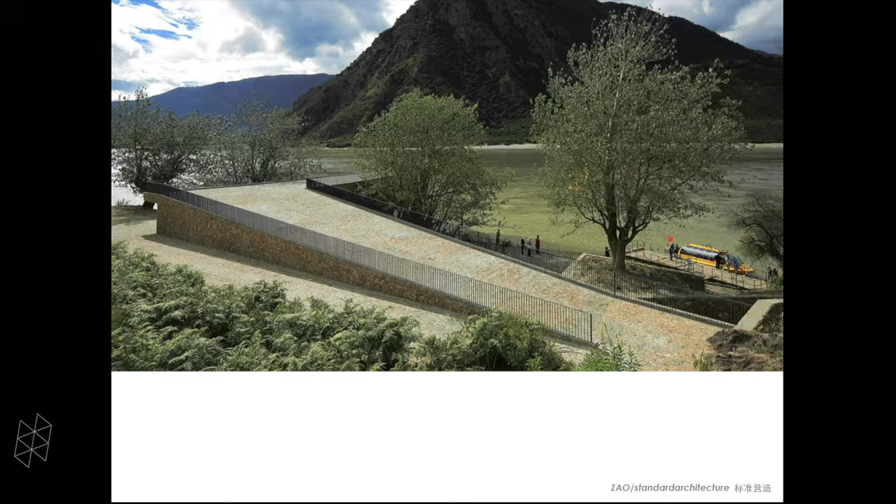So this is how this first small boat terminal was. You can see here there are just 3 parts. One part is the waiting room for the boat to arrive or just arrived, the second part is the toilet, and the third part is the section that cantilevers into the river, the Yarlung Tsangpo River.

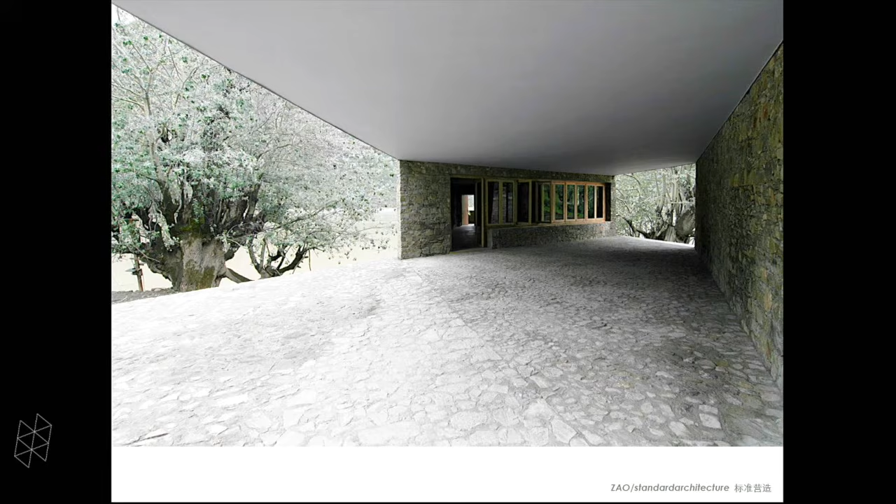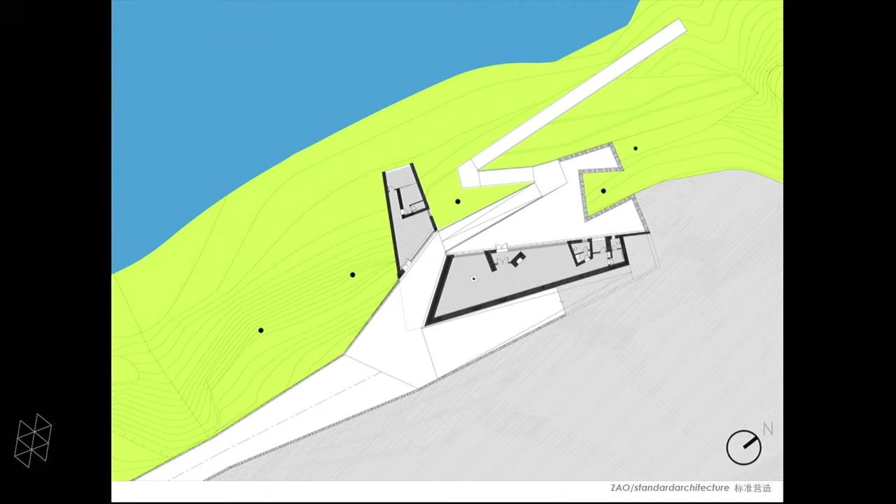Of course, sometimes the weather gets so bad that you have to stay overnight, so this room is for passengers to stay overnight. On the plan it's very simple—it's this ramp going over. We found these 4 very big trees, and you can see the plan was studied for quite some time until it reached this simple state.

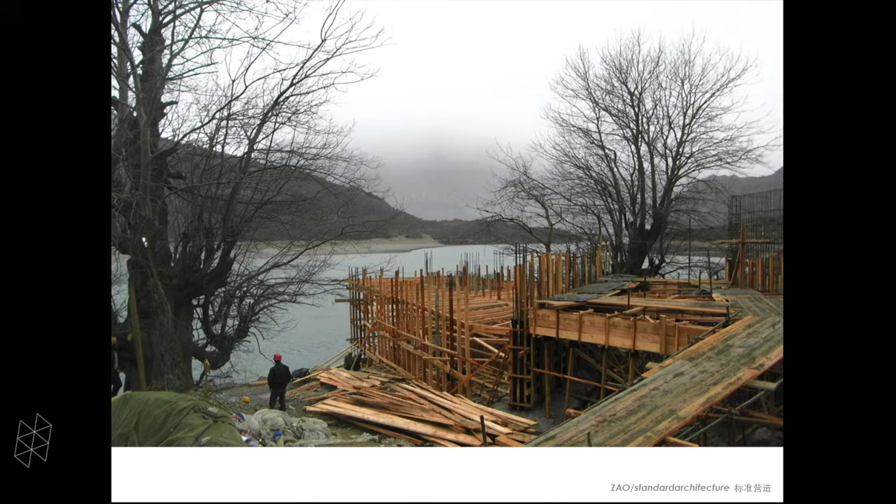This is the stone material collected on the site, along with these very big trees, which we had to protect in the process. The construction itself is very basic, I would say.

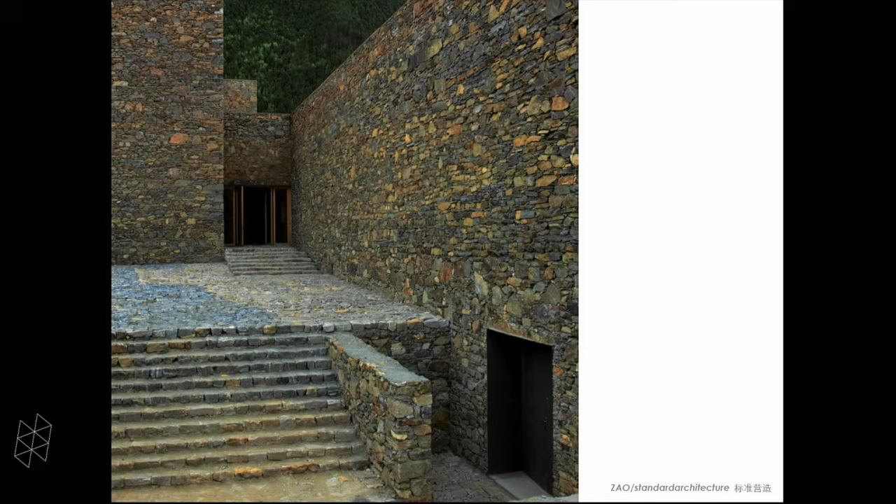The second building is this visitor welcoming center at the entrance of the Grand Canyon. This was also designed at the same time, almost the same period, but of course this one is bigger. At the entrance of the canyon there is this mountain, so we wanted to do something that's almost a landscape installation.

So it has this slice of a rectangular volume that cuts into the hill and grows out. The fact that I took a landscape studio here at GSD was very helpful, because in Tibet, architecture is landscape, and landscape is also architecture. That's also to see it not only as buildings, we have to always engage the topography, materiality, and also plantation there.

I wouldn't go too much into description of this. I know Frampton showed it last time, but it was also a lot of spirituality deliberately designed. I call this a stairway to heaven. We have these narrow walls and then the skylight coming down.

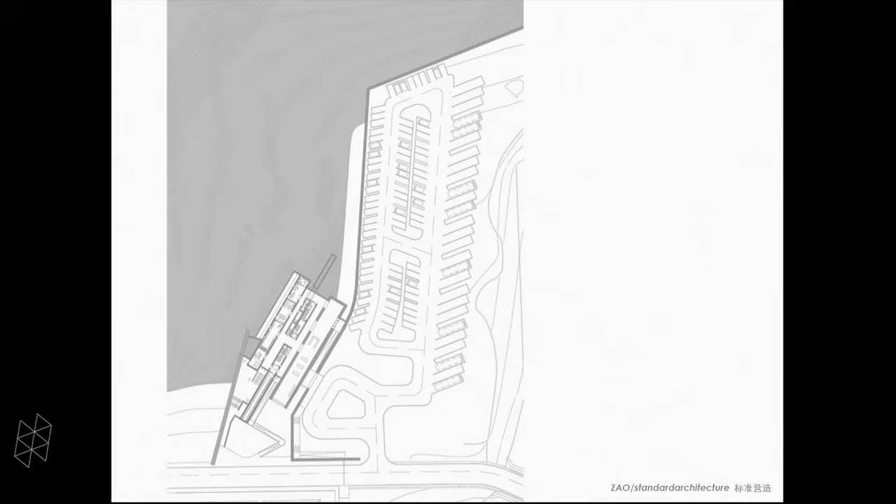We're lucky that we were able to get one meter thick stone masonry walls to build, with only concrete reinforcement. And this is the section, you see the existing slope.

One of the interesting parts of this building is we were able to draw resource of the masonry workers from Shigatse, which is close to the Ali area, to this area, because they are famous for building very nice masonry walls. So we couldn't have designed these patterns as it is, but the good thing is to give them the freedom of interpretation, and involve them in the building process.

One of the biggest debates here was how to have something clearly contemporary without shouting out, which I think is very easy nowadays - to be loud and contemporary - but here we wanted to do something more quiet.

In Tibet, because of the masonry walls, they have to build thicker on the bottom and thinner on the top, because it's just masonry. So here, one of the deliberate expressions is we made the wall deliberately straight, to show that it's not one of these other vernacular buildings without too much thought.

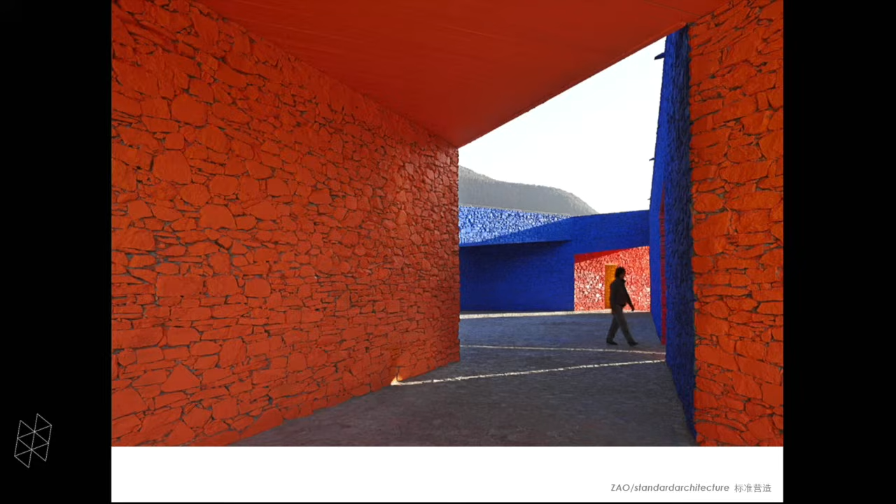Around 2008, I started something in my studio, a semi-independent studio, because I was aware that now in China you have a lot of great talent that comes to work, but it's impossible to get them anywhere in the world - you have them stay in your office forever. So I decided, why don't we speed it up? After working in my studio for four years, I set up this semi-independent studio, which is Zhao Yang's studio, who later was recommended by me to come to GSD.

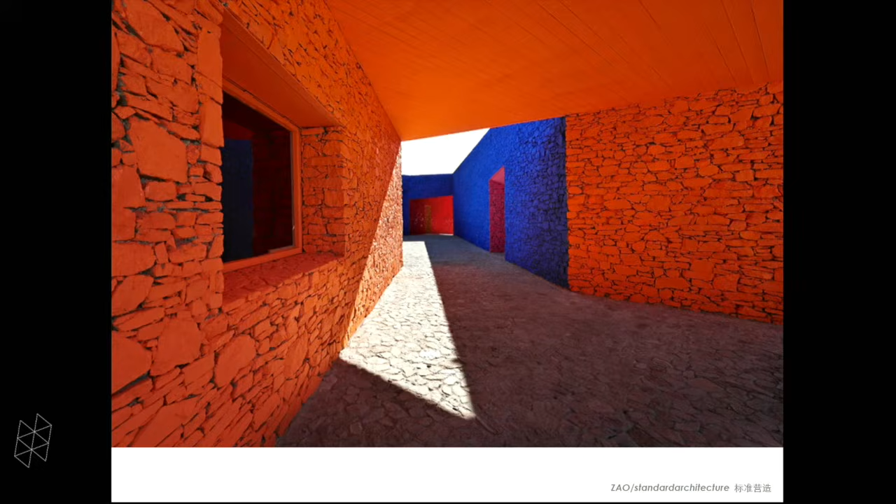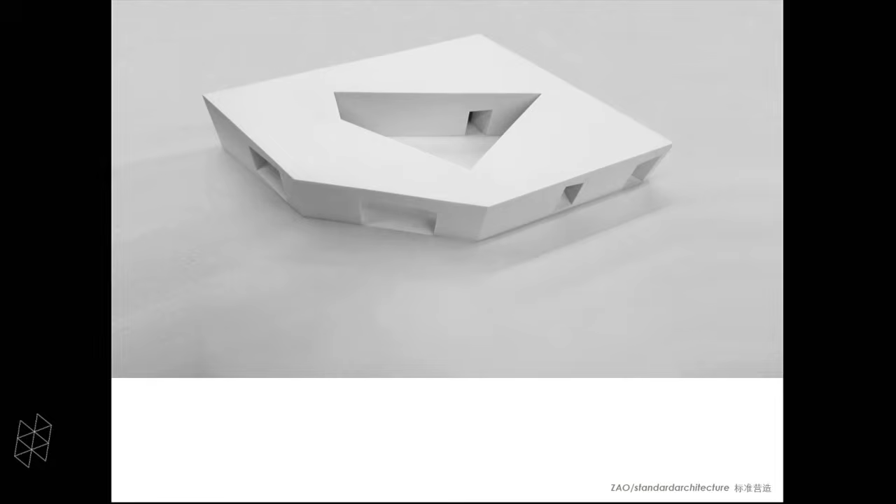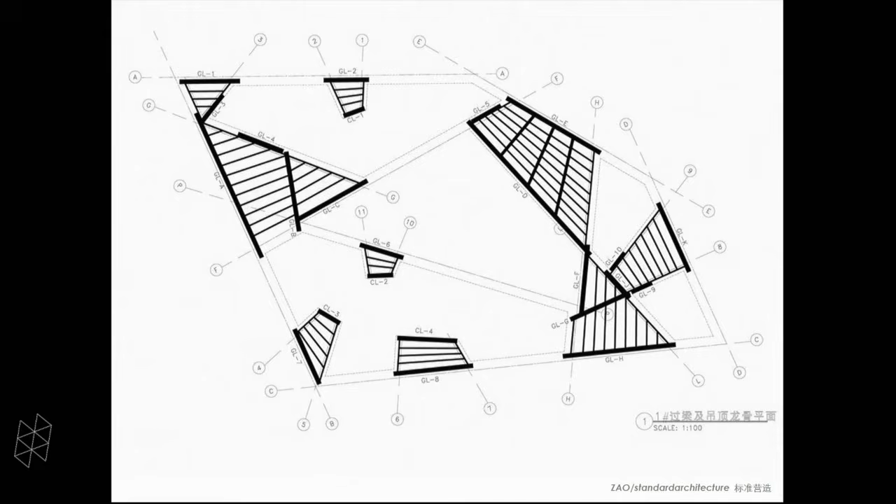Now he also was part of the Rolex program a few years ago. The idea here was to do something completely with wood structure, while the former two buildings used concrete reinforcement. This one took the structural types exactly like the old houses in Tibet, using these wood beams.

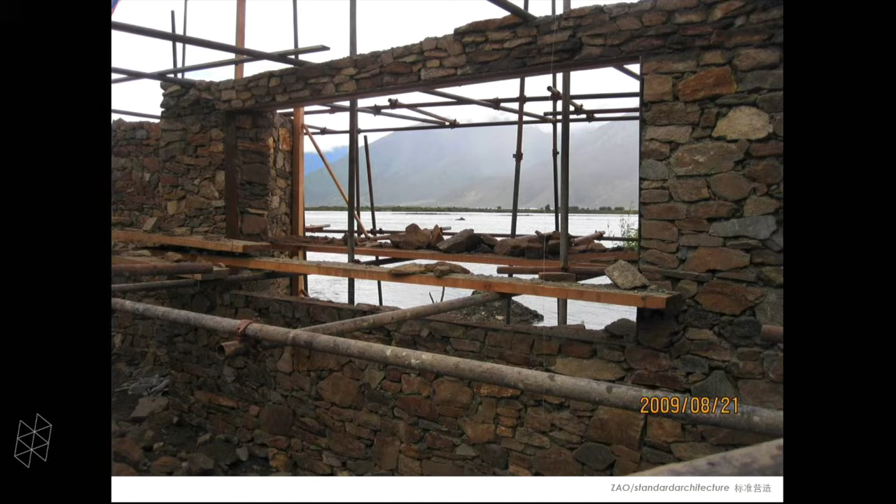We wanted to see if we could make a completely contemporary building that nobody would doubt from even the first sight. The whole process of building is very humble, but in the end, the idea is that at certain point, stone can also fly.

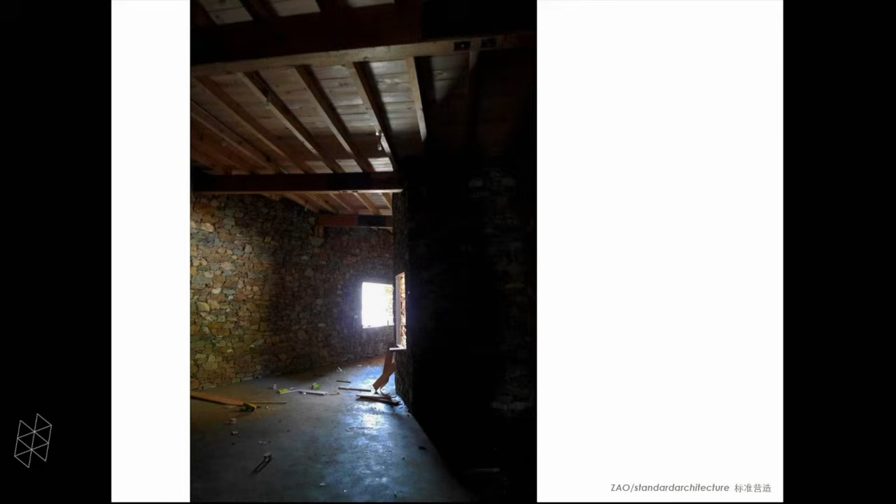Of course, this building, in the end, until now, still remains one of the illegal buildings, because we cannot get approval - it's a totally traditional structural typology that cannot get approved. If you don't use steel or concrete, you cannot get approval. So yeah, it's one of what we call the unauthorized buildings.

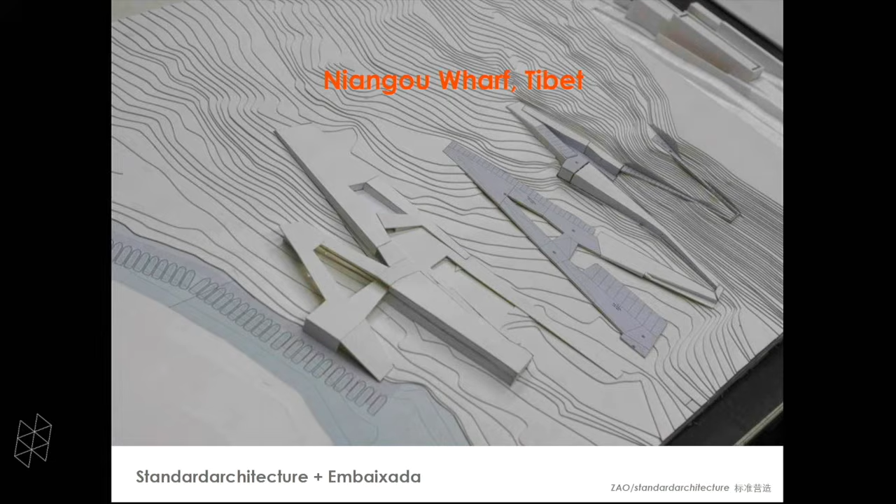The other building I'm going to show - at the same time we also invited a young Portuguese office called Embaixada, because one of my partners, Claudia, is a landscape architect from GSD, one of my classmates, and she's from Portugal. So we invited them to brainstorm for the first month, and we came up with this nice idea of one of the biggest boat terminals, similar to the other small one - a ramp going up and zigzagging, sometimes as a waiting room, restaurant, and parking lots, winding up to the boat driver's dormitory and their recreational space, a little auditorium and office.

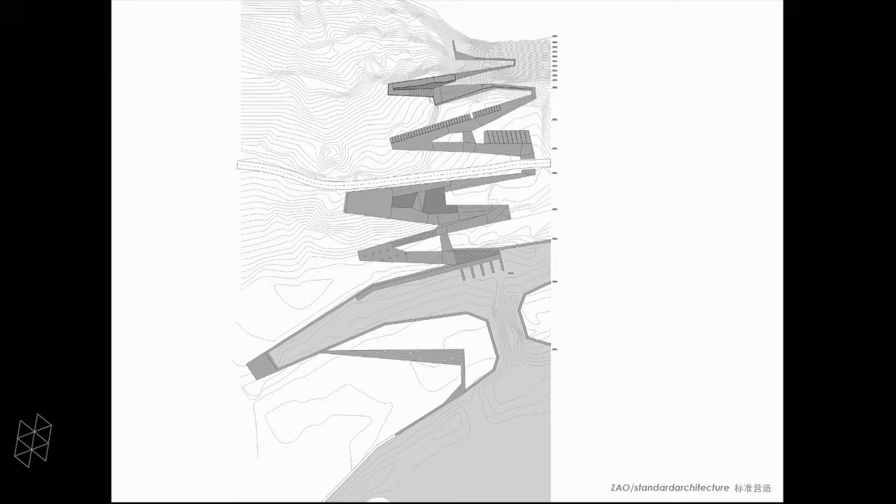I think this is totally a landscape, which in Tibet is, of course, very strong of the site, but it's also part of their own building tradition, which is what they call Tianti, like stair to heaven. One of the interesting things is actually all of the stone used in this building we carved out of the site, so we don't have to ship a lot of materials from elsewhere.

And again, clearly on the windows and details, we refuse to adopt any kind of typical Tibetan motif, because we had some debate.

One thing I think is interesting about doing projects in this kind of culturally very strong background is what I call looking eye to eye, on the same level. Because usually if you go to Tibet, there are two types of people: either you look up so much that you admire them before you even go there and say 'I copy,' or you have this condescending attitude, saying 'I know so much, I'm from the advanced world, I give you something.' So, but then, you know, we have to...

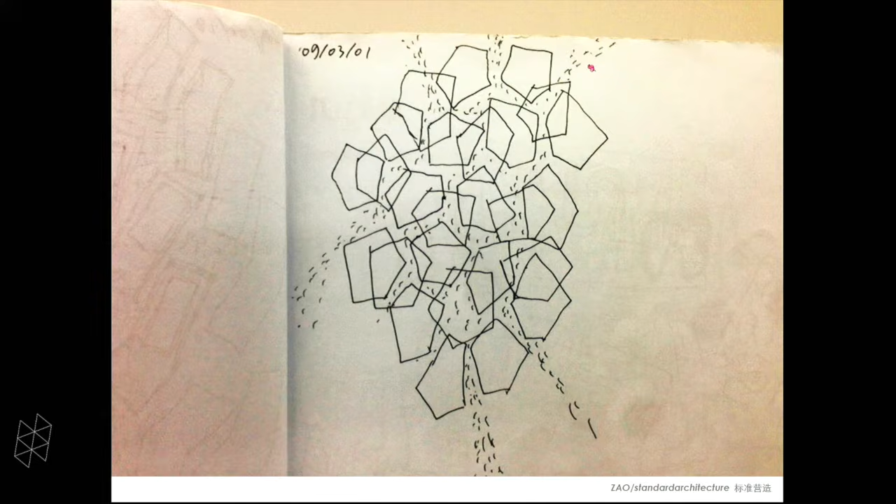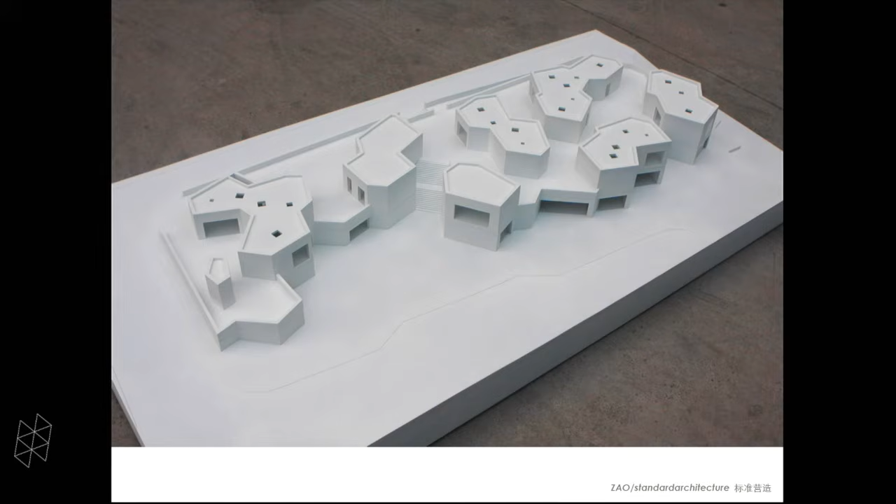This is a bus station and art center. The art center, of course, was proposed by us because they wanted a big bus stop, as well as a big tourist canteen. And then because it has two levels, on one level higher, this level is the bus stop, so we have a big public toilet and canteen underneath.

And here we made this kind of village-like street, which also resembles some of these big rocks up the hill. And because this is one of the biggest buildings in the village, we don't want to make it look so intrusive. Actually, when it's built, it works quite well.

Reflections, you can see the village. And that's the kind of decorations that they have.

The last building I want to show in Tibet is this. Actually, it's not a building; it's this landscape. It was not a project in the plan before, but we were planning this route also when we drove by, and then in the back is this Namcha Barwa, beautiful mountain. This is the Grand Canyon, and then this is this very old mulberry tree, whose canopy is about 40 meters wide.

So I talked to my friend Oh Yang, saying, why don't we make a place here that people can come to contemplate. The original way I persuaded him was to say, maybe you can build a place that people can get married here. They said, oh great, you know, that's the idea. So that's how they got budget, but which is not too much.

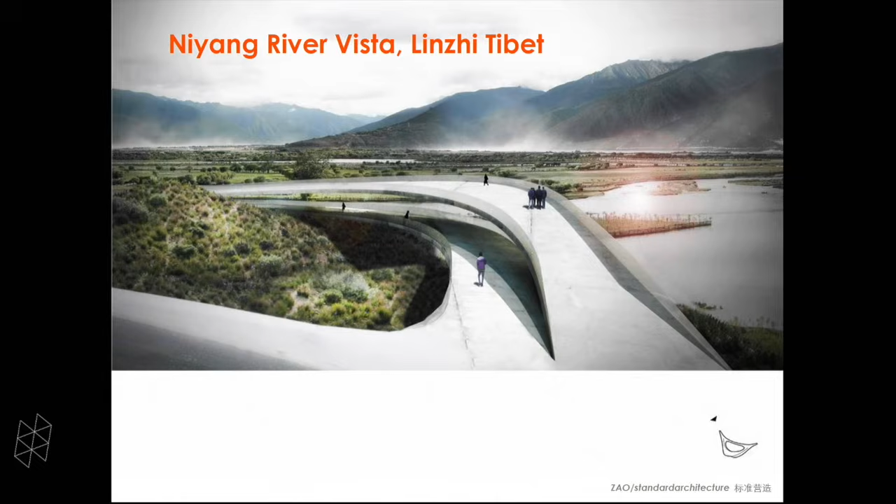And the other one is at the merge point of two rivers, where they were planning to do a Vista Point. I intended to design something that's a Vista Point that moves, so people can see the movement of the two rivers, with a Tibetan teahouse underneath. So they all liked it. We worked out all the construction documents two years ago, but now the company already made some money.

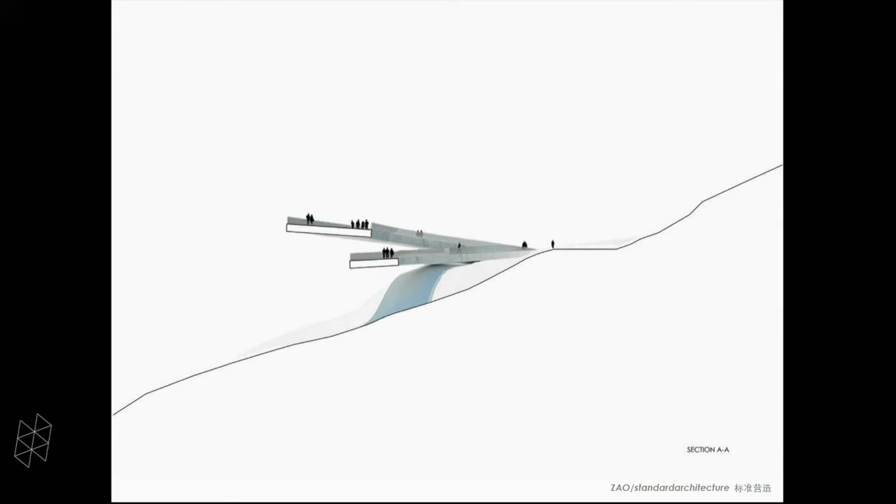They have a lot of bureaucracies to control us, and this building they calculated is four times their budget, so they still haven't built it. But the idea is maybe at certain point we don't have to be totally limited to the idea of being extremely humble.

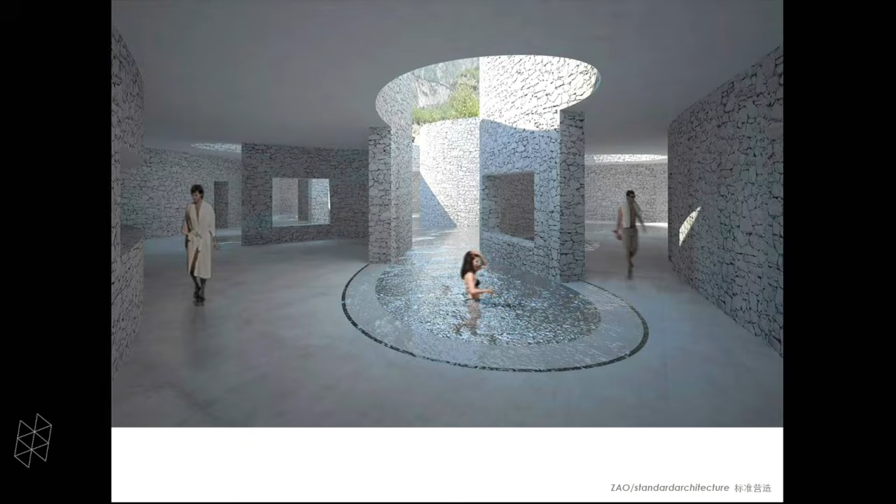At certain point we can go with stronger improvisations. This small spa also got cancelled because of landsliding after our design, but of course this hot spring is natural, and the idea of this is very interesting. It's the concept of a spa. We asked the basic question: what's the best spa ever we can have? Among our 20 schemes, this was the best answer: the best spa ever was us inside our mom's belly. So it's this kind of protection.

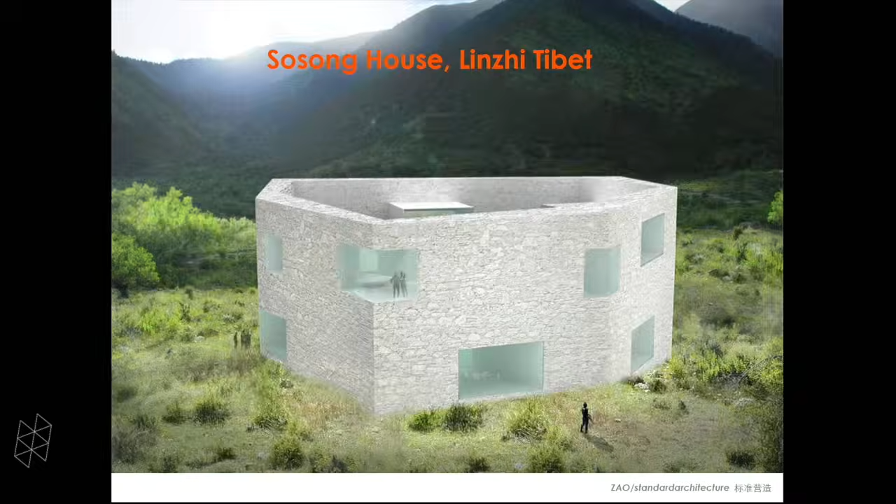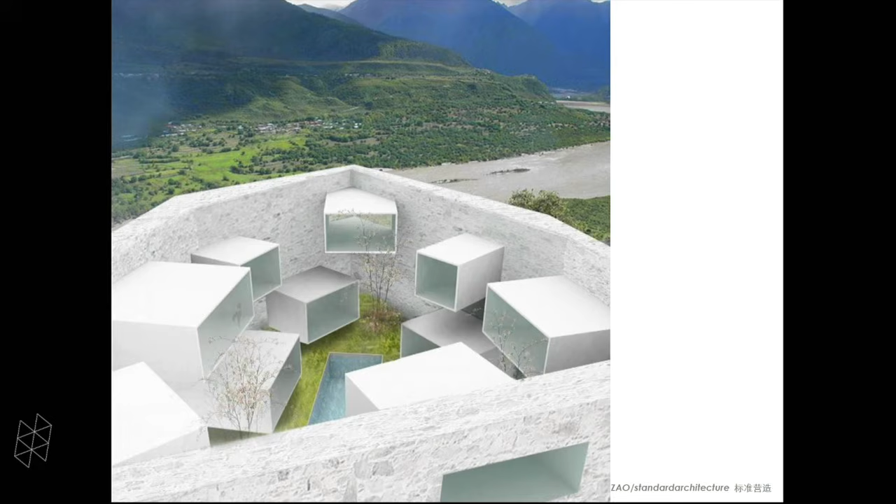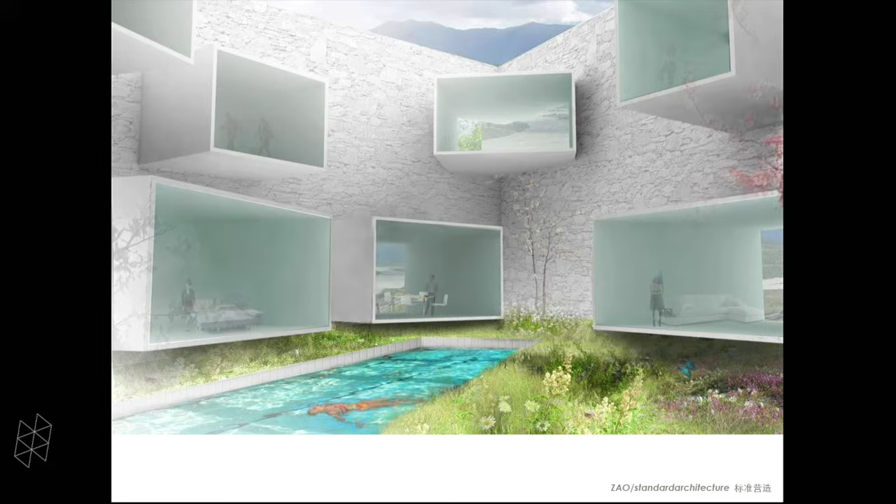And this is a house which we designed on top of one of the mountains. It's kind of luxurious because whatever direction you see, there's a snow mountain peak. So we linked these directions, but in the end, it's the first time we started to do these inward rooms. That's not just a window; it's a room that's cantilevered in between two stone walls. But in another aspect, the idea of Chineseness or the Oriental feeling, as opposed to the Western idea, is more of an inwardness.

This didn't get built, but of course this idea got continued onward. It moves to, and after 7 years in Tibet, of course it still continues, but now in China the trend was all the architects started to go to the countryside. It's becoming more of a new trend and a fashionable thing. So we said, okay, it's enough. It's time for us to move back to the center of the city.

So we went back to the center of the city, and here we have, in front of the Forbidden City and Tiananmen Square, this Dashilar area, which is a historic area, and Baitasi area, and also Houhai area. And on the east side, we have our first city wall project, which was our first project, in 2001.

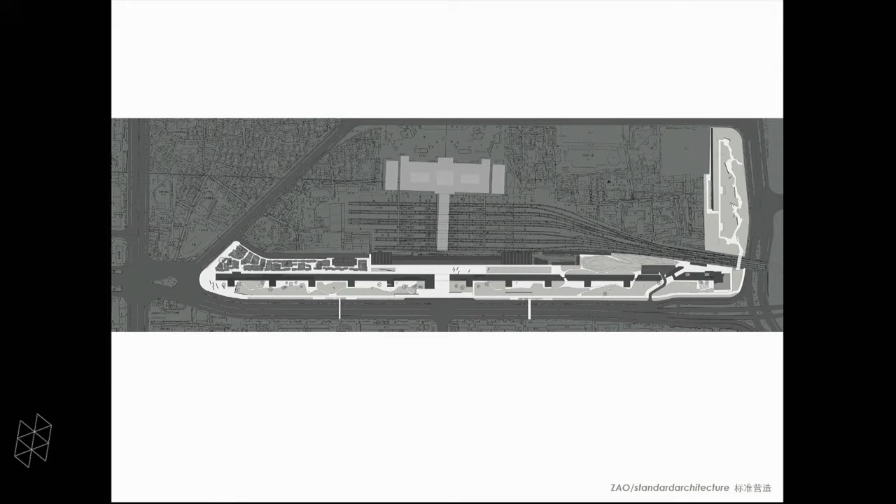This was when I was in 2001, when we first got started. There was an international competition for the city wall in Beijing. As you probably know, the city wall of Beijing got demolished completely in the 50s. Then by 2000, they suddenly discovered that there's one section still here by chance, about 1.5 kilometers in length, to the south of the railway station. They were kept because the workers' huts were built on top of the wall when they were constructing the railway station.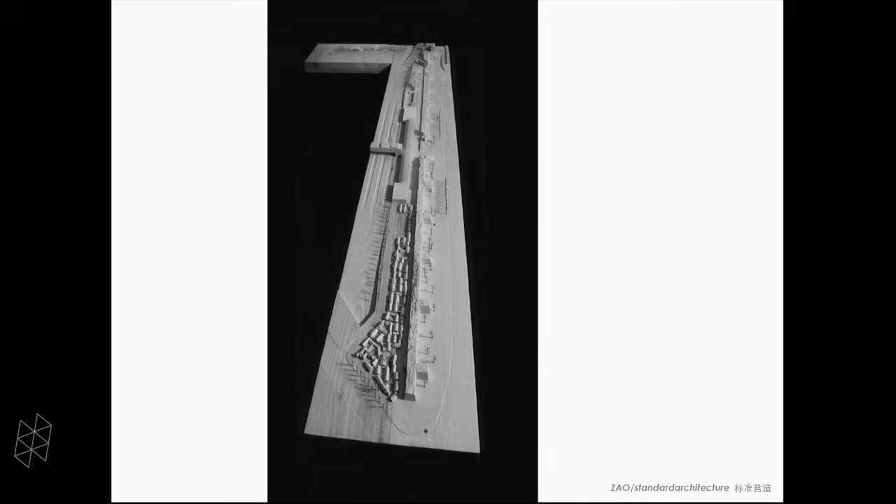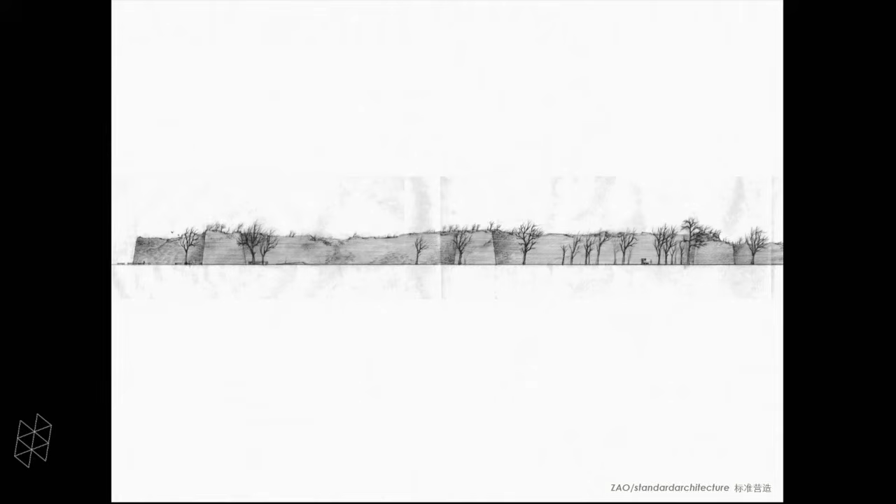And then the competition asked for ideas of what to do with the wall, so of course we did studies and surveys of the wall and life along the wall. We won the competition unanimously from the juries, because we were the only ones saying come on, don't do anything to the wall. But for a competition, it's very daring, because everyone else was proposing a steel wall, a glass wall, a water wall, a laser wall, whatever. Our idea was that the raison d'être of the project, the wall, is to show the evidence of history itself, rather than to fake it.

And then we proposed, as part of the kind of urban design approach that we learned, a south entry linked to the subway, etc., with the south of the railway station, which is now built, not exactly as beautiful as we designed, but more or less it's there. And then the wall is kept, and we had a park around it for the art festival, design weeks, etc.

And these trees, we surveyed them. They didn't even have any documentation of the trees, which I think also benefited from my study of landscape here. I guess more of you would start to take landscape studios here, but we gained awareness of how to document the trees.

So it's now a quite popular public space. And then in the past 4 or 5 years, we started in these few areas.

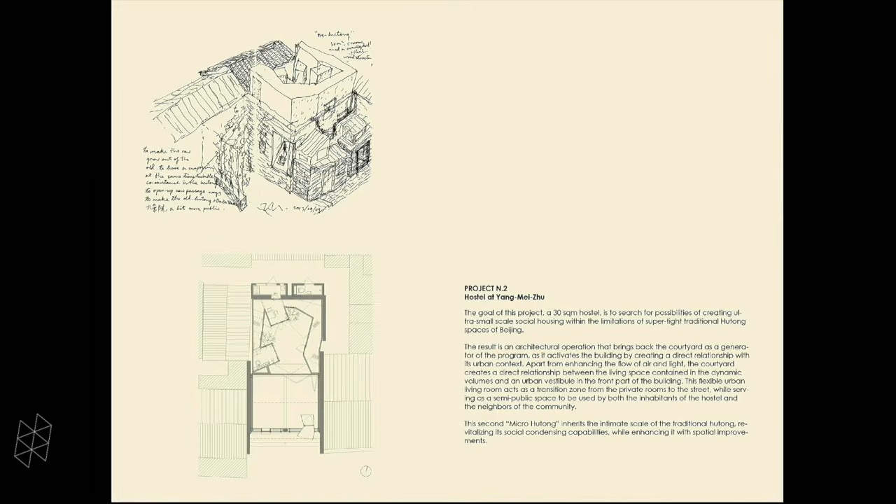We did about a 2-year study of the strategy, because they always have these big messy courtyards. We were studying how to subdivide them into thinner slices so that they still form a kind of courtyard series, while incorporating the people who choose to stay and introducing different programs.

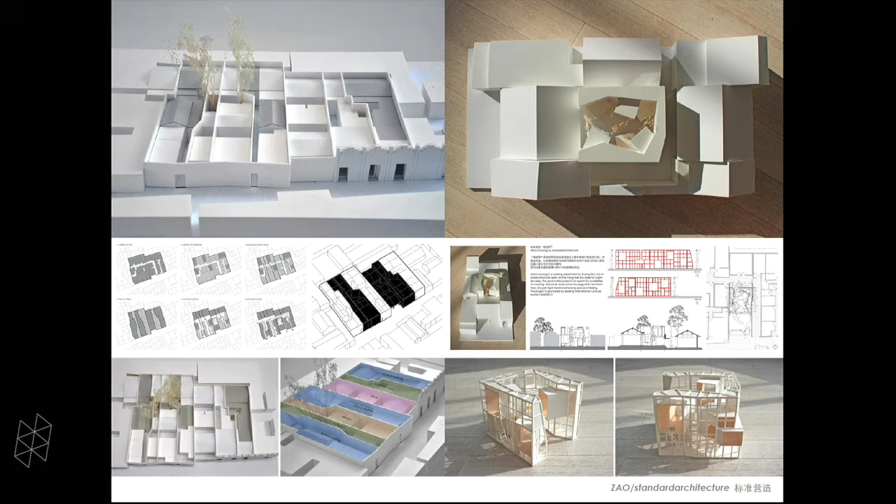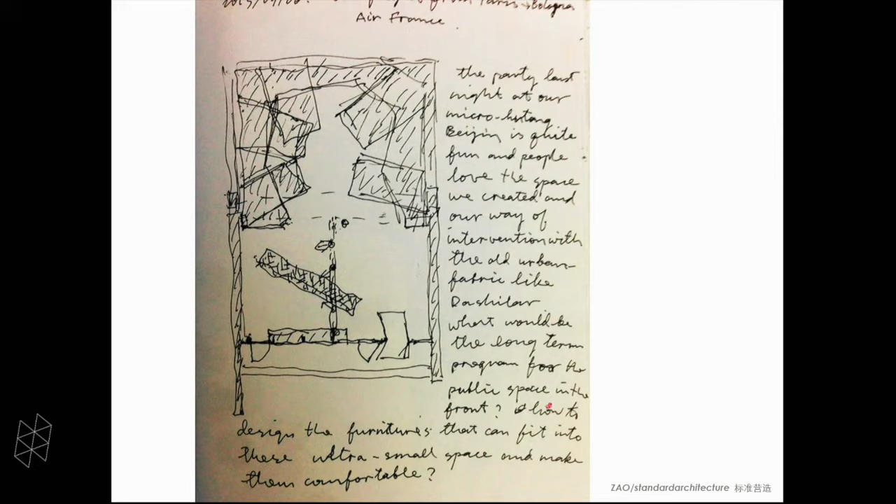That's the original idea, and the micro Hutong was one of the first slices we realized. That was 3 years ago when we did an exhibition, and also a plywood kind of mock-up.

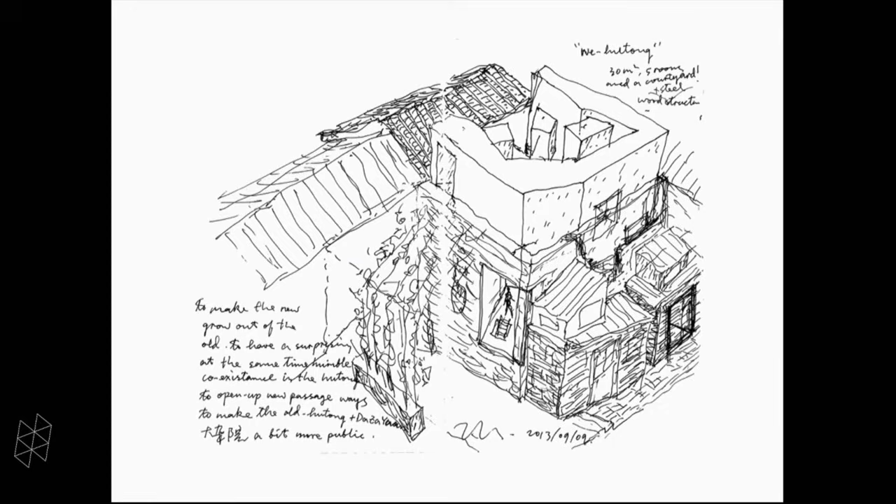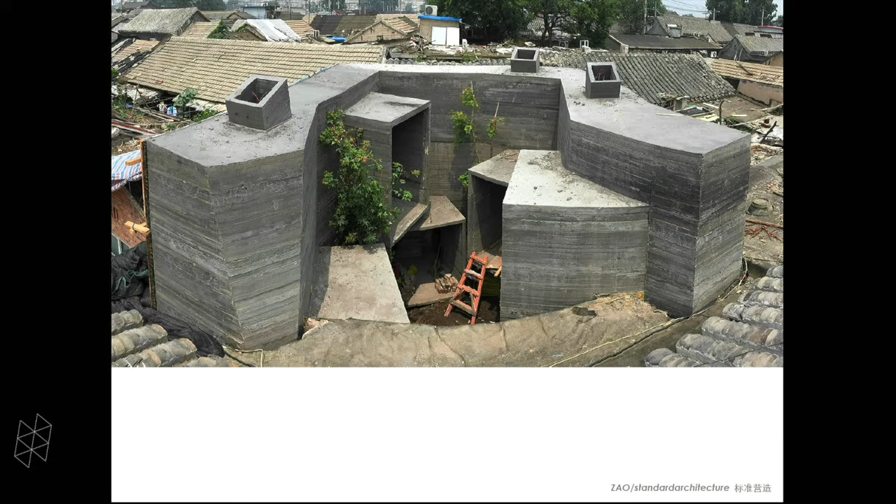The idea here is to keep all the boundaries of the wall and these informal additions that people built, and to have the new grow out of the old. There was no courtyard before, so we were able to create a new courtyard without increasing the building area, which is still just 35 to 40 square meters.

When it's finished, people immediately really like it, especially the kids. Whenever the door is open, they come in to occupy the space.

And of course, the neighbors also come to see that even within the height limit and building area regulation, they can build 5 bedrooms with a toilet, so theoretically this could house 2 families, which is the same area occupation as traditional residence.

And here you can see we have a real full... there will be a curtain in the future, of course.

But the new one we get is very advanced. We have floor heating, double glazing, an operable window skylight, and small windows for natural ventilation, plus central air conditioning, all hidden within this 30 square meters.

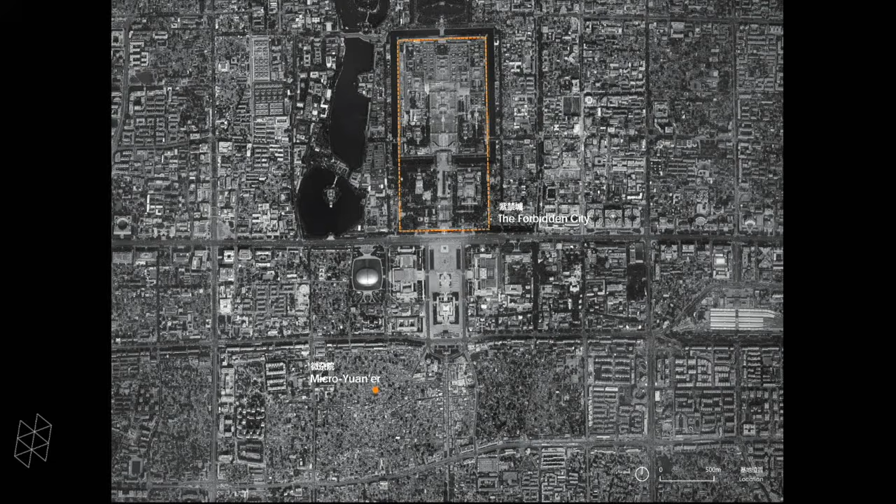As you can see here, this is another kind of typical big messy courtyard situation. This Cha'er Hutong is also a more quiet Hutong area, and next to it is one of the important mosques in the area, called the Qianmen Mosque.

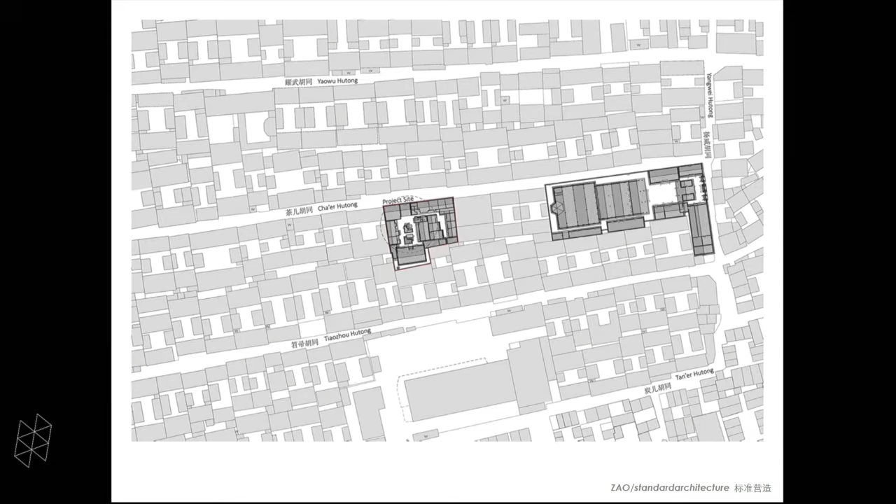We also did some interesting study, because in the old city of Beijing, most local people don't even realize that traditionally there were lots of Muslim residents, an occupation dating from Kublai Khan's time. The old residents of Beijing were mostly Muslim, and now they've become more and more discreet. They don't show the dress, but in terms of religion and belief, it's a very interesting discovery.

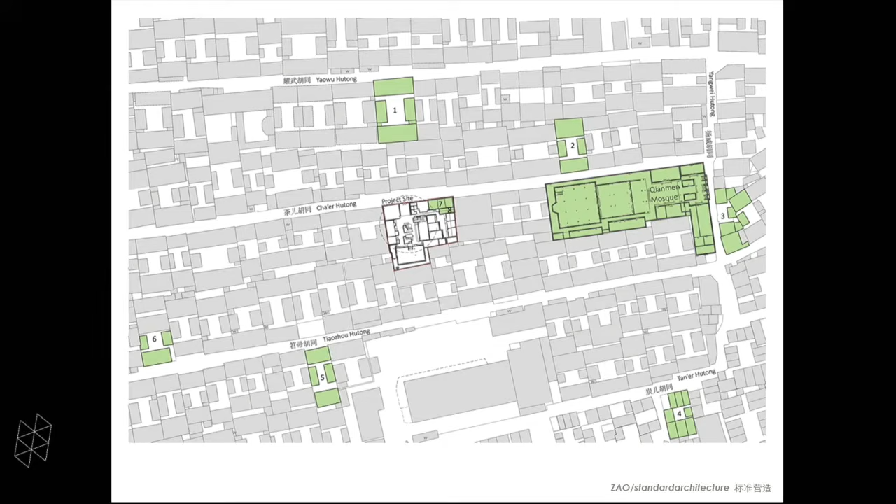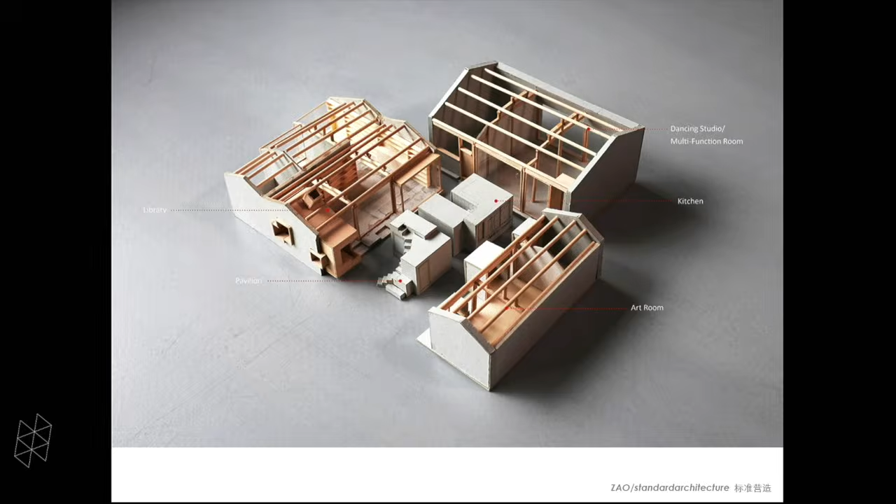And even within our courtyard, there are 2 families. So the idea here, I'll show the other models, is that we have these big messy courtyards.

In the beginning, it was 1 family. Then from the 50s through the 80s, it was subdivided into about a dozen families, so every family started to build a small kitchen for themselves.

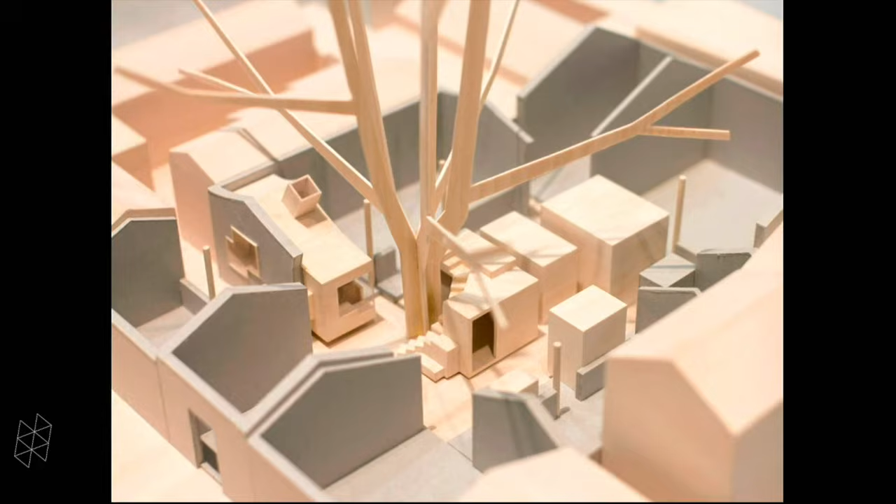And these kitchens are, where is the, yeah, here. So you can see it, these are the kitchens. And this kind of situation exists in almost every big courtyard in Beijing. But traditionally now in all of the operations, they're automatically removed to go back to, say, 100 years ago. But we were trying to test that maybe this is the most interesting contemporary urban spatial fact that shouldn't be forgotten.

What we can do is maybe introduce, since there are a few families still living in, some public program. We were negotiating with the owner, which is the government there. By inserting a small children's library, this was here because this was the only space available in the beginning. And then we redesigned this garbage pile-like space into a step, a small gallery for children, and it started to grow.

It's a process. It's not something that's designed at once. It's been 4 years. So, of course, we studied that one of the important populations in this area is children and old people. And of course, to design something for children we always thought might work, but we were not sure in the beginning because they don't know what to do. We were coming up with this program proposal.

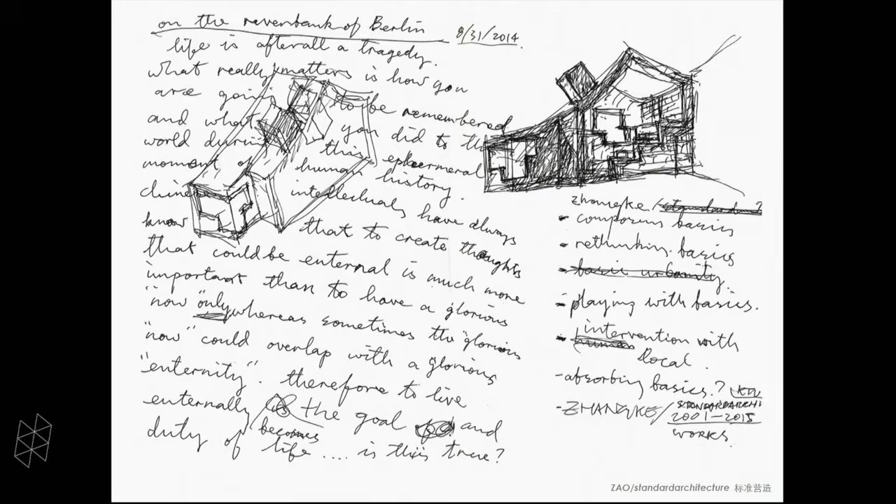Basically, at the time I was traveling around the world and doing a lot of this communication with the team. I see some people here who also worked in my studio.

Yeah, they really improvise a lot into the space. Actually, a month ago, we were there, and this was not planned. This man, he was the one-man band in the next Hutong. So they invited him. He was playing for the old people and some people, obviously, from the outside, some of the students in the studio, actually. But they really use it.

Also, this two-thirds of this temple space, the other one-third is still occupied by one family. So we proposed this multifunctional, also dancing space, and they started this—completely not planned. They just... and you see these pictures are taken by one of the kids themselves. We just gave them the camera, because the way they look into your eyes is different—it's because it's one of the kids who took the picture.

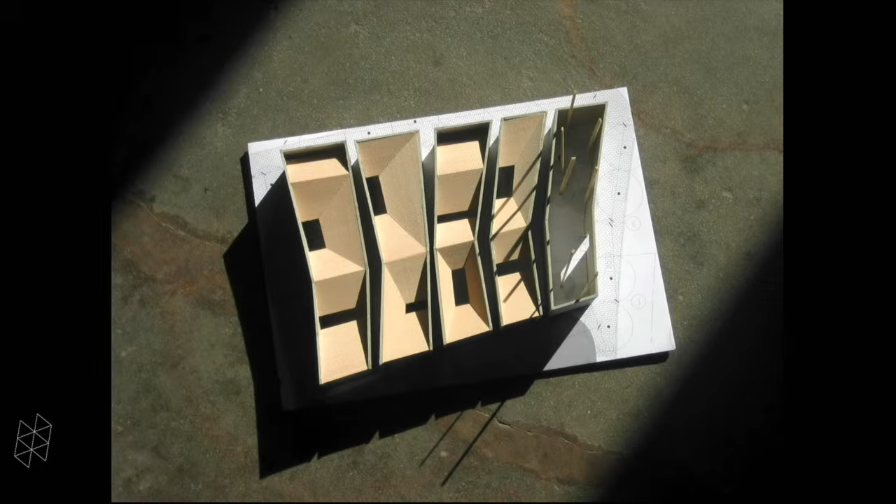Okay, now it goes beyond. There's some projects. This is a tea house we did in 2008, also in the countryside with local sandstones. And of course, the roof in Sichuan—you know, all the buildings were open to the air. So we used this traditional wooden structure form. But the only request I made to the contractor was to remove these 2 columns so that it looks like it's floating there.

I always include this project in my presentation because this was our first baby. 2004, we first built it. This is an auditorium building for a primary school, elementary school in Beijing, on the east side, outskirts of Beijing. It was donated by one of the developers who took part of the school's land for their housing. So they gave 2 million to build this 500-seat auditorium, only 2 million.

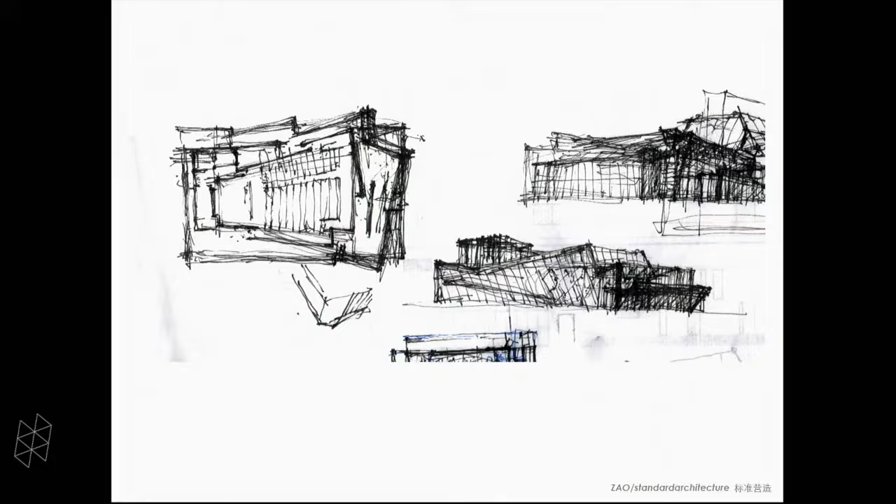Originally, the plan was more zigzagging. But then, after discussion, the budget was so small that we couldn't do too much of that. So we reduced it into sections, and this is the house, the stage, and the lobby, and the entrance. It coincides with these three elements.

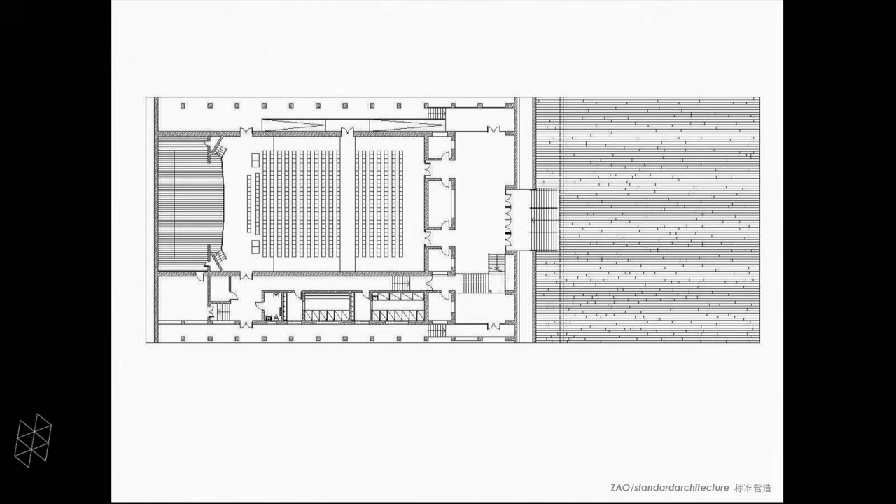On the plan, it's extremely rational with house, stage, lobby, and then the service space. But it's not symmetrical, so it's off-center deliberately. Anyway, we got lucky.

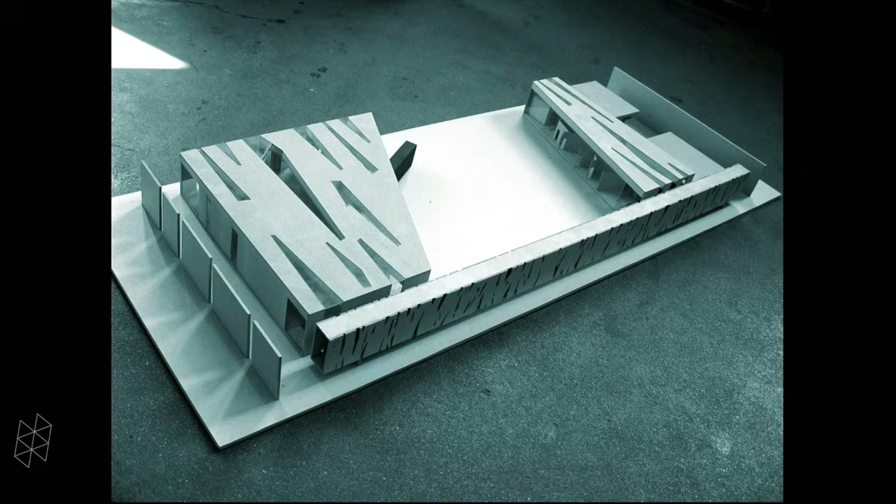The other one was also an early building, which we did with almost calligraphy, Chinese ink. I always wanted to experiment with this kind of almost intuitive movement, how this could project into architecture. But of course to do this is very easy, it's like 3 minutes, but then we suffered for 6 months trying to realize it. That's how architecture and life is about.

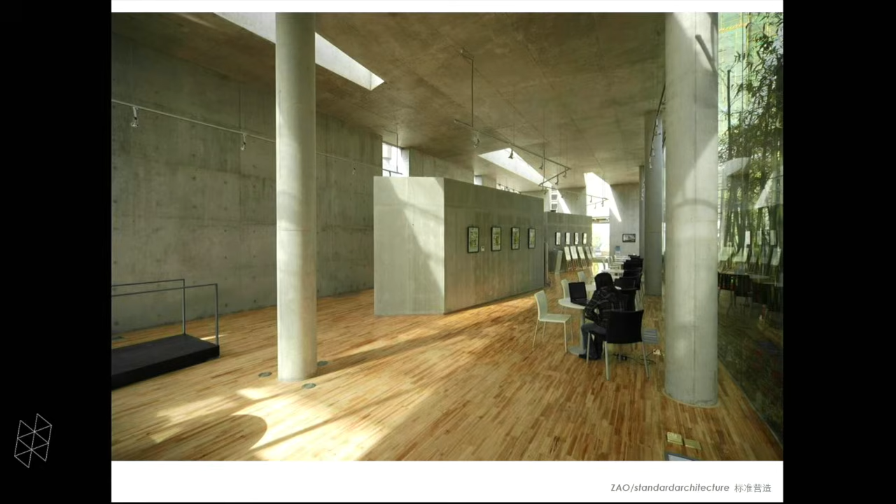I wouldn't go too much into it because this is already 10 years ago, more than 10, 12 years ago.

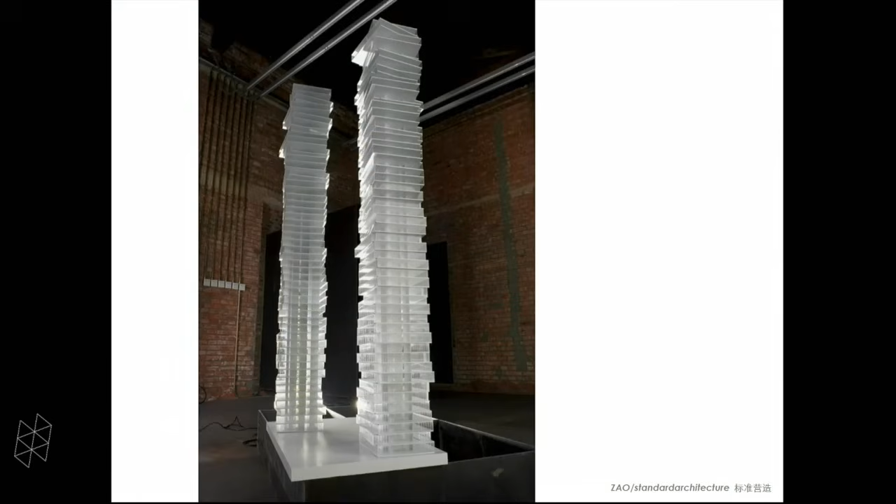A tower, of course, in here we have to show one tower I did. This is not very tall, it's 150 meters high. It's just very thin, its typical floor is just 400 square meters. But then the discourse here is about, for towers, there's so much vertical freedom already expressed, but the horizontal kind of freedom is not explored enough. And this is a real project.

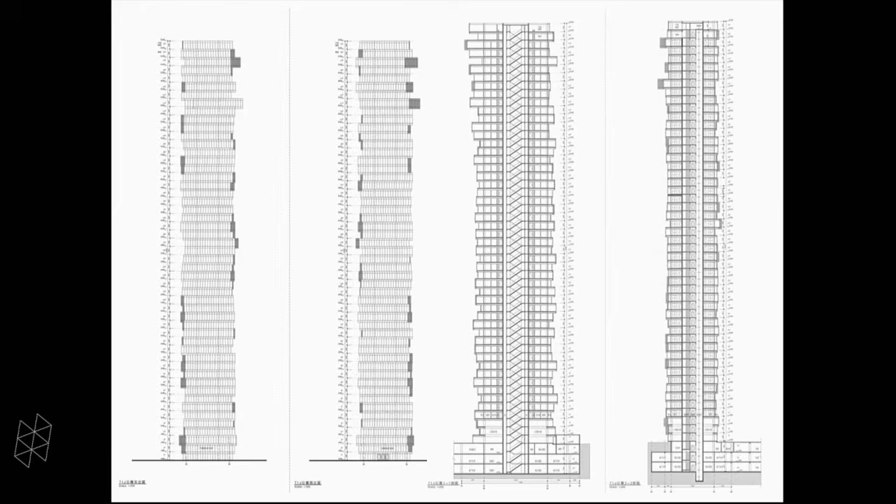Each floor is a unit, with 360 degrees of view and some terraces shifting. That was 2007, we got the complete DD, they started construction already, and then there was the 2008 crisis, and they stopped it. Actually, if they built it, by 2012 it would have gone back.

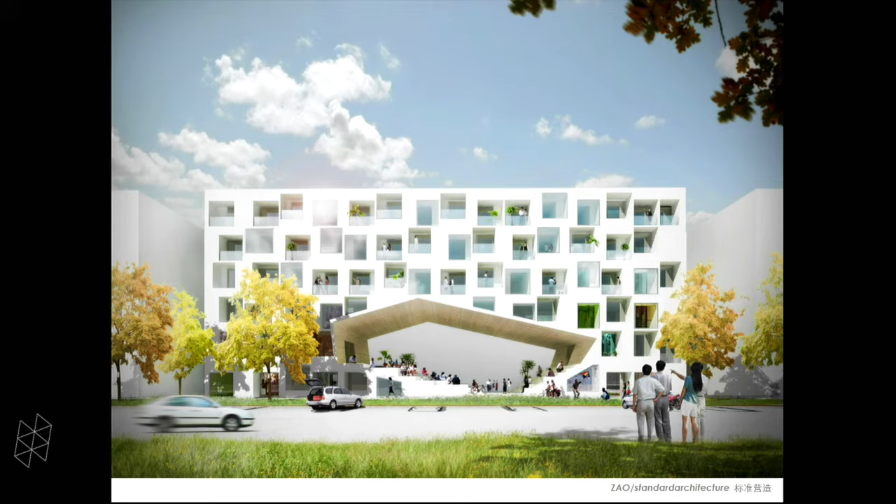And the other building was social housing, which we did together with 9 other architects, 5 from Holland, 5 from China. Social housing with Zhang Ke.

The discourse here is to say these are super dense, the building between each other is just 8 meters. So we said, okay, let's build one space for everyone. This is a theater that could be a food market or improvisation, etc. Because it's social housing, it's only 15 square meters per unit. But social housing doesn't have to be sad looking always. That's one of the ideas.

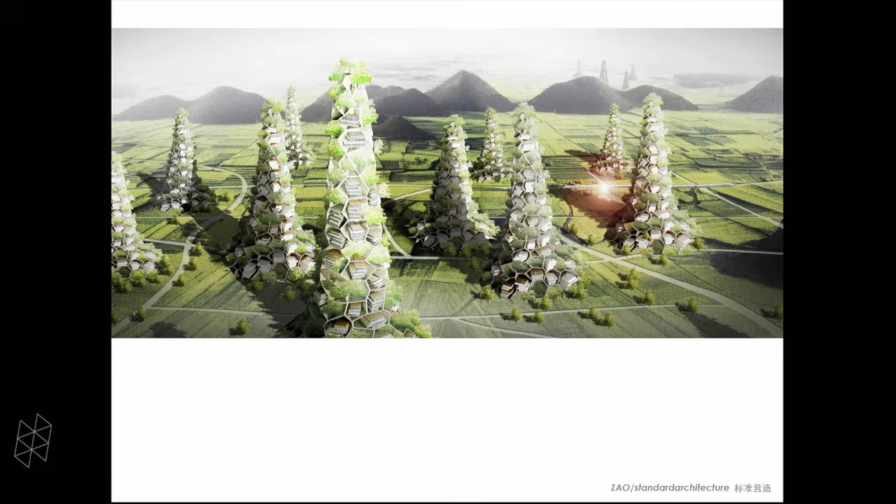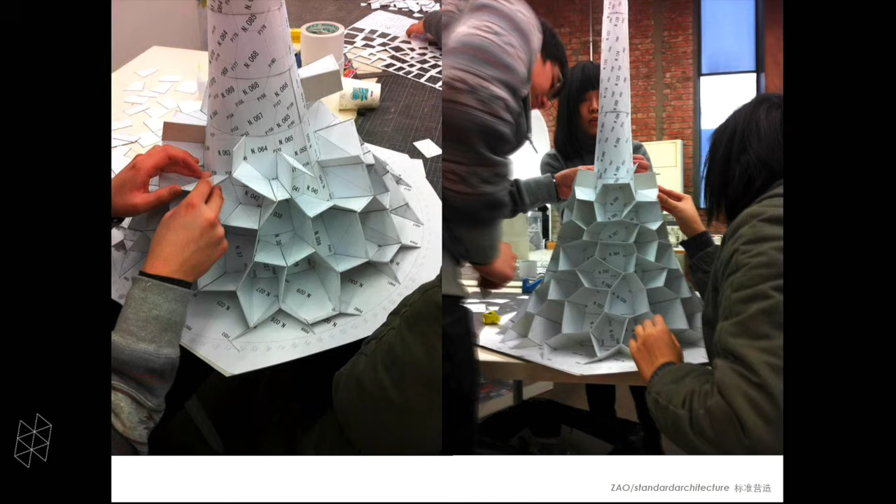So each of these towers would house, say, 3 villages. And of course, there's a lot of digital helping with this.

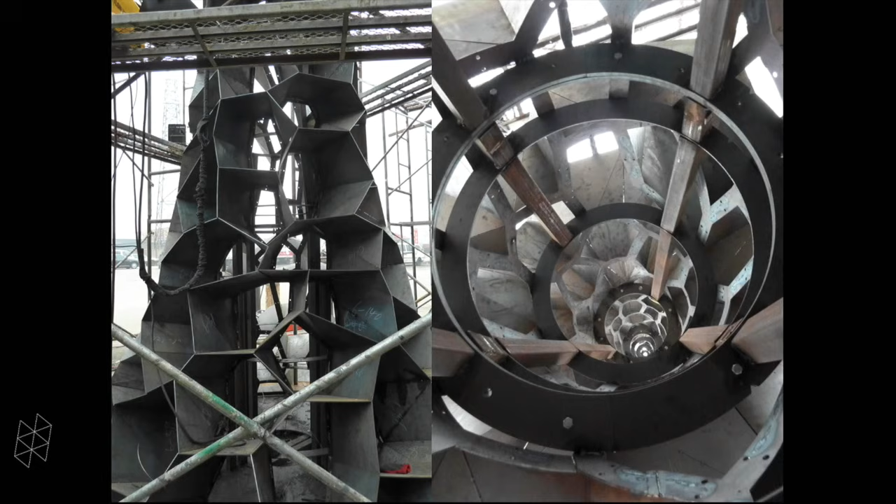In 2012, we proposed this to Milan Design Week, shown in the main exhibition called the Statale, where I think the year before Zaha was there in the same space. They said, you're crazy, you cannot build it. But we did it, of course. What we did was hire a whole Boeing 747 from UPS to ship this thing there.

We are crazy, yes. But people really enjoyed it because it became one of the pieces they still remember. Later they brought it to the marble city Carrara, and then after Milan Design Week it was sent back to the Beijing Design Week to this Ai Weiwei space.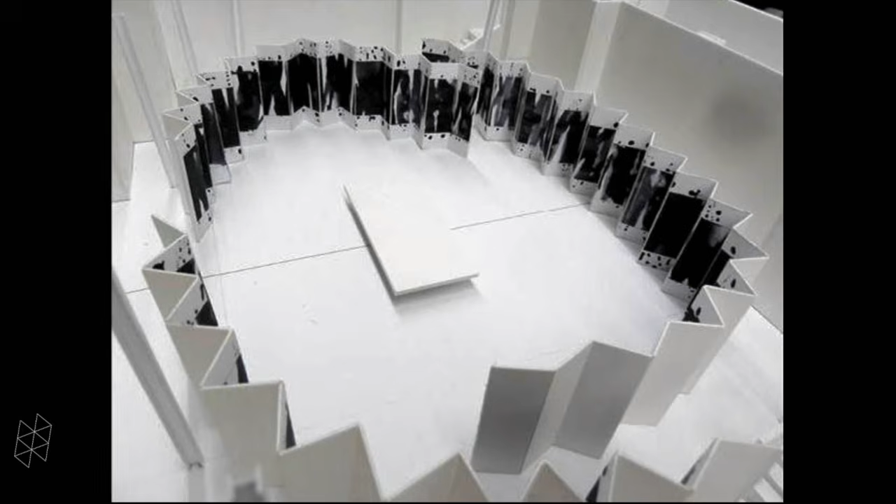After this, I also conceived an idea of a studio for a 1km high habitat - so not a 1km high building. There's some very interesting student work I'm not going to show here. This was an installation I did for Design Week in Milan for Moroso's 60th anniversary.

One of the interesting things about the Western perception of China is they always want to see explicit Chineseness, and they called it water dragon. I said okay, but I'm not going to show you a dragon - so I call it invisible, hidden dragon. This project is a hidden dragon.

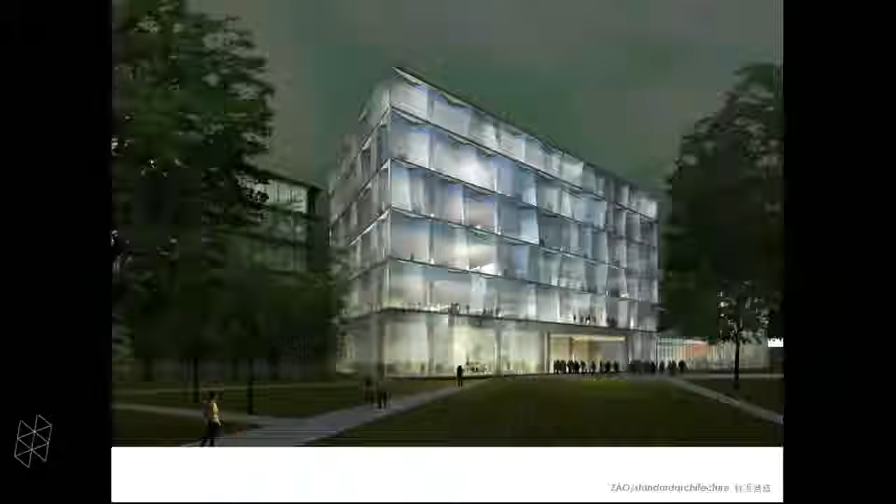Of course, we also designed the sofa, which is reversed - the sofa to sit back to back. And those, I'm not... but this building is more serious. It's what we just finished for the Swiss Novartis Campus.

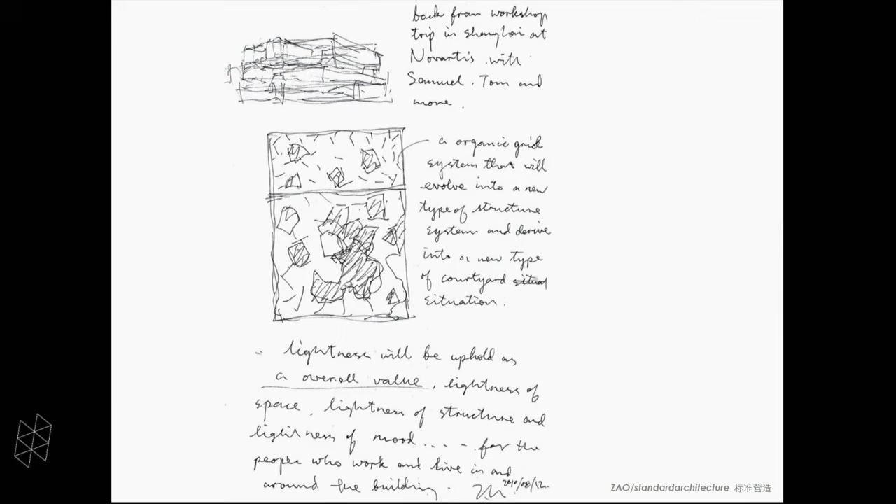It actually took me 6 years. The first 3 years were almost 50% of my time working on this, because they didn't allow us to publish, so it was almost secret. Now in June, it's finally inaugurated.

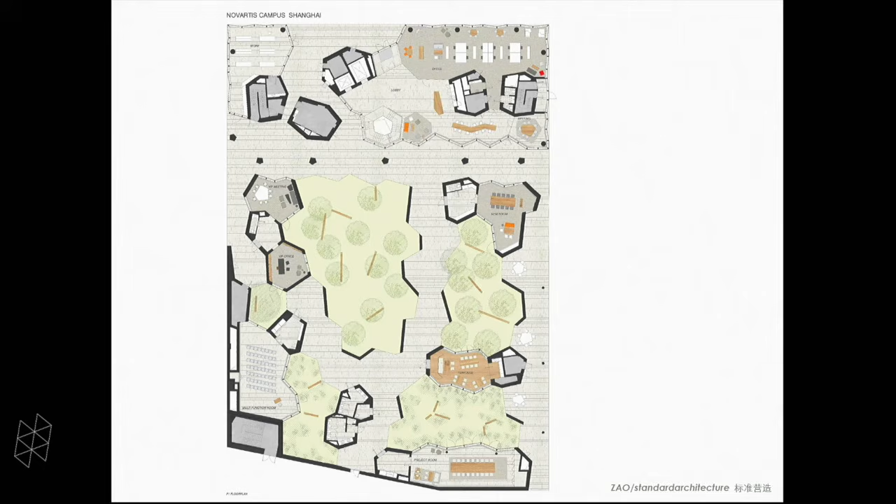The idea here is a kind of organic cellular system - that's the parameter of this system. One thing I want to say is in high school I was super into physics and mathematics. I never thought I'd be an architect, but somehow, mistakenly, I ended up here. But this module system, the basic geometry that can create those possibilities, always fascinated me.

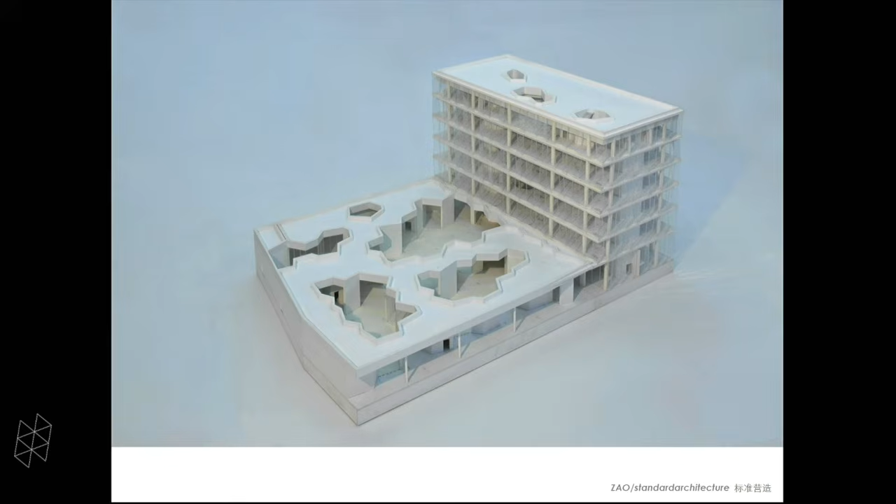So here we're lucky - we're probably the only building in the Novartis campus that has this crazy interior network inside. This also became something I started the same day with Aravena. Our buildings are facing each other. It's good because he has a complete solid building, and I have a complete transparent one, but inside it's a system.

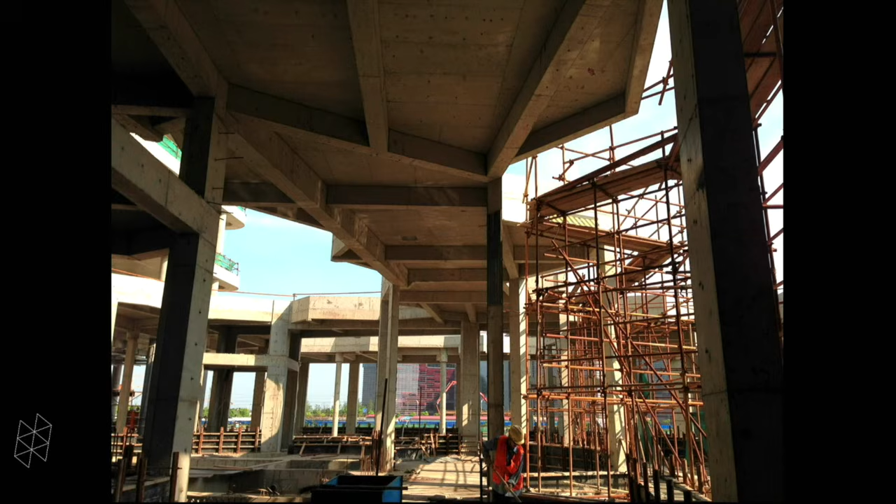The idea here is to have this system, but not just let the system work on its own - to have a lot of human interaction, which isn't like just having a system and it's nice. The parameters need a lot of personal interaction and adjustment to make the space interesting.

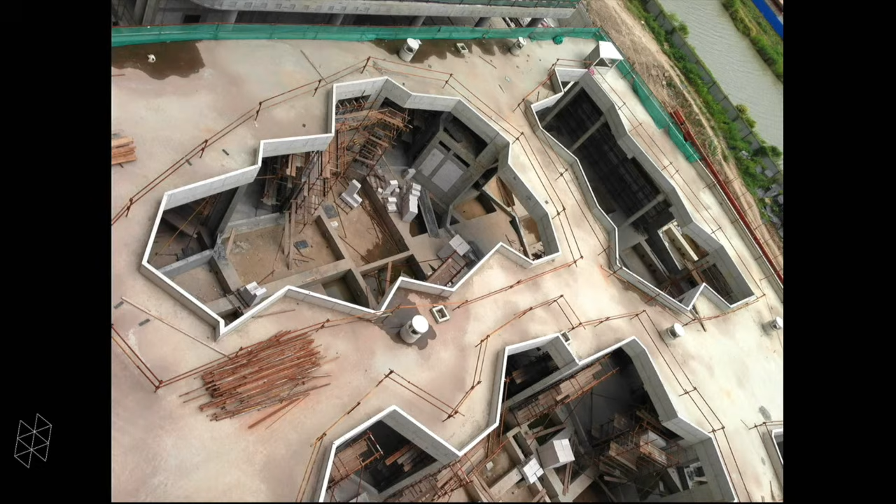Of course, this is another kind of Chineseness idea - totally inward, with 5 courtyards that wind up the stair into a roof garden.

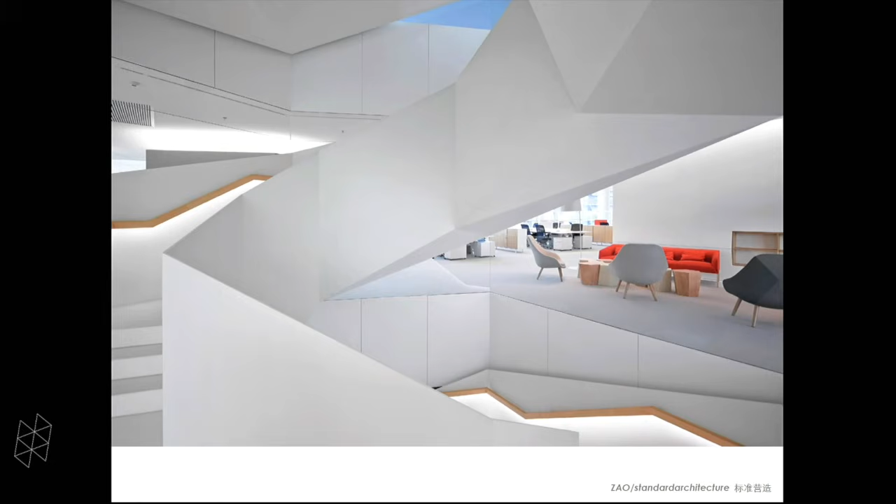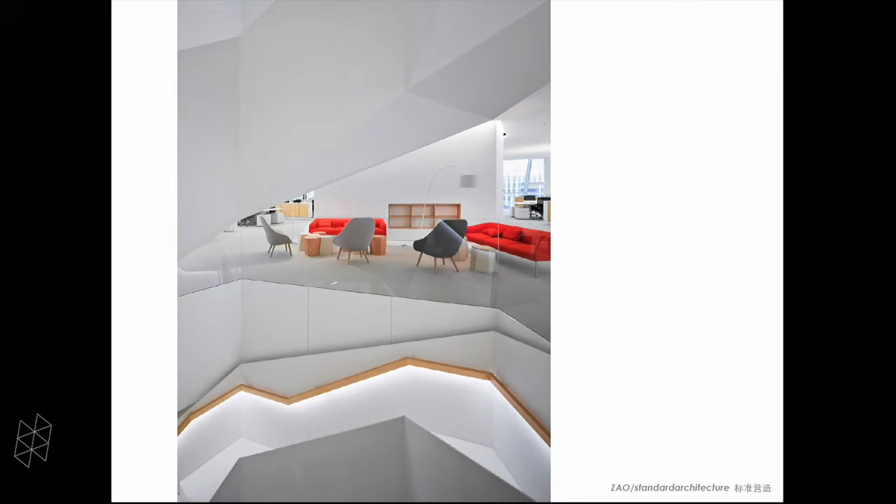We were very lucky because we got great support - we have Terry Bell who worked with Frank Gehry for many years. He also hired Gehry Technology to rationalize our curtain walls, and interior design support also. We designed it through DD, and then CD was EXH, who's half Swiss.

The movement inside - so the inside is also a landscape. These glasses are each 5 meters high, triple glazing, open joint. The larger pieces are around 10 square meters.

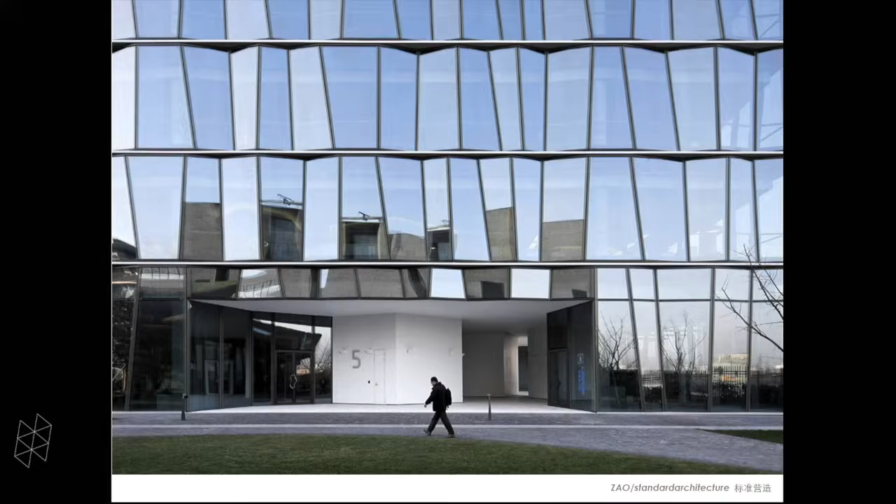We selected - I went to Milan to select all the furniture and lighting, and that's the other extreme, like we do.

Besides the humble ones in the city of Beijing and Tibet, also - last one is my office, which is to the north of the Forbidden City. We redesigned the inside - so it's another inside-out approach.